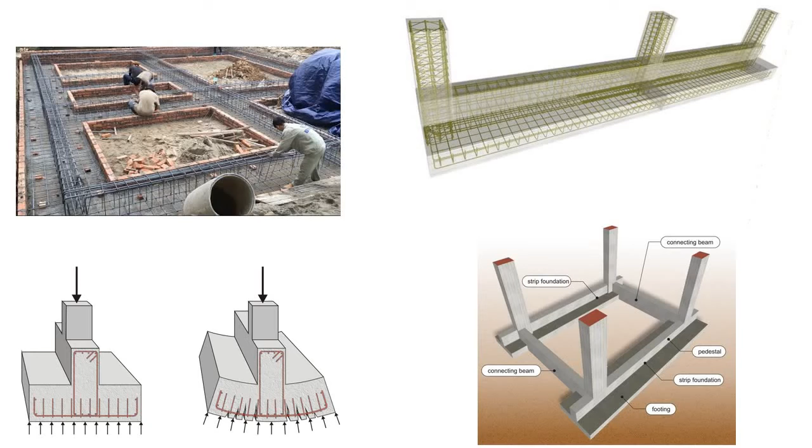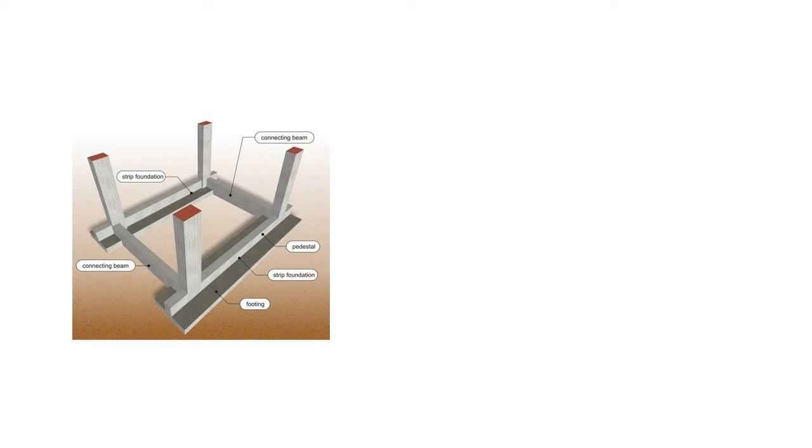This video is going to be all about the detailing of strip foundation and its design aspect. My request to you, if you are already familiar with this type of concept, you can simply skip this video. But if you are a beginner, please watch this video carefully to understand the basic concepts.

Basically, to provide any foundation of any structure, we may have only three options. First one is you can simply put an isolated foundation like this. Or you can provide some strip foundation like this, where you are supporting multiple columns by means of a single foundation, and sometimes a single slab is sufficient, or sometimes you may have to provide an extra beam like this. Here you can see, this is the extra beam, or you can also call it as a foundation beam.

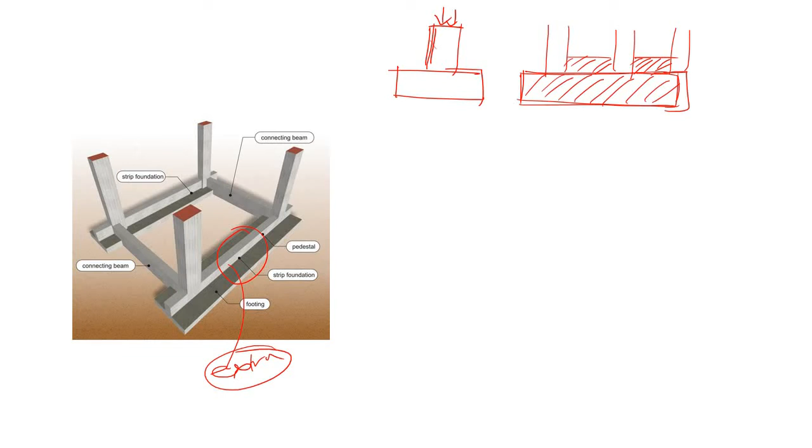And the last option is your deep foundation, or you can say well or pile foundation. You may have multiple piles, and above it you may have some pile cap like this, and then you are supporting your column. I'm not going into the detailing about isolated foundation or the piling foundation. In this video I will discuss about this, the second option, that is your strip foundation.

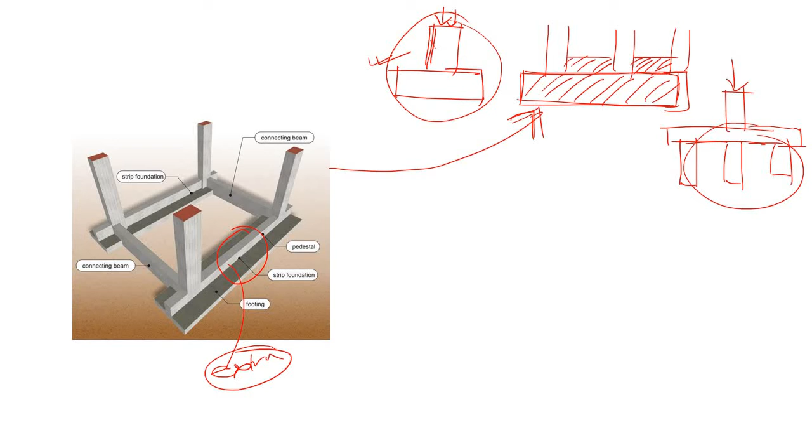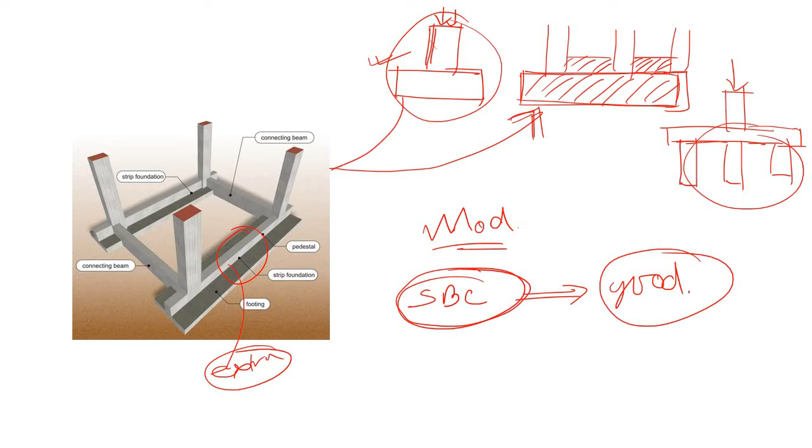So when do we need a strip foundation? Of course, when an isolated foundation is not sufficient and a pile foundation is not needed. Basically when you have a moderate category load, or the soil bearing capacity of the soil is not that much good. If the safe bearing capacity is good, in that case the isolated foundation is sufficient for a moderate category load. But if the safe bearing capacity is not that much satisfactory, or if the load is slightly on the higher range, in that case we may have to use this strip foundation.

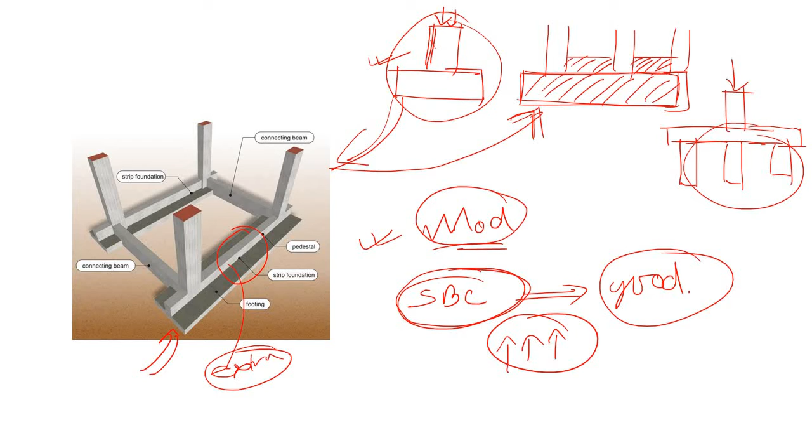Now this is a very diplomatic answer. As an engineer, we always have to give answer based on data. So first let me erase this one.

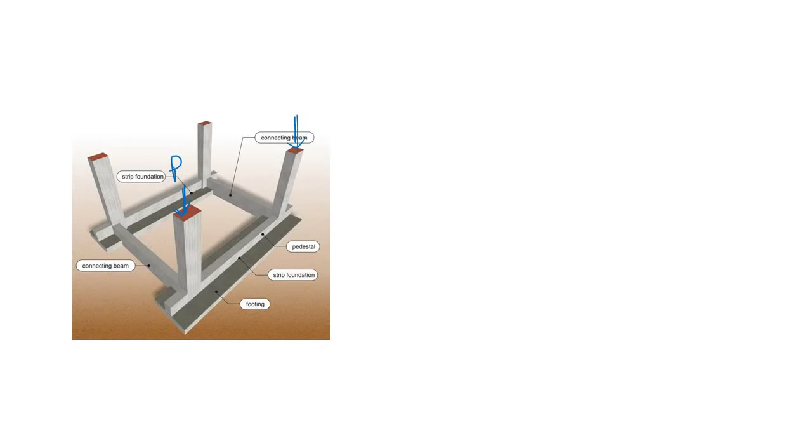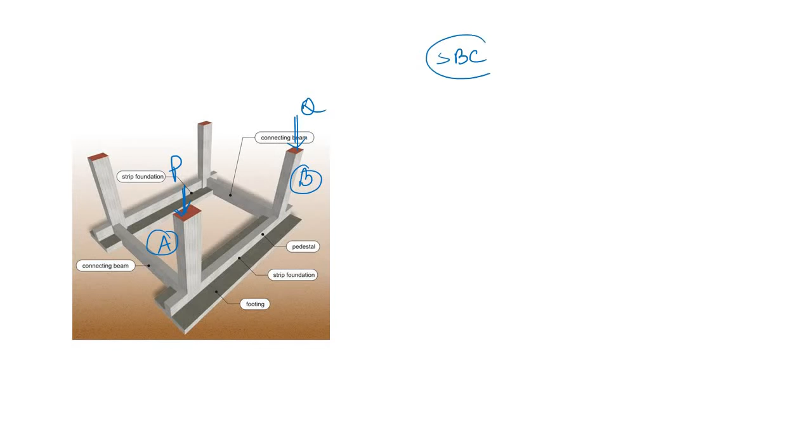Let's say this is the load coming on this column, P, and this is the load coming on column B, let's say this is Q. This is column A, and this is column B. Very clear? Now based on your safe bearing capacity of the soil, you can calculate what is the area required for an isolated foundation. So for isolated foundation, area requirement for column A is, let's say, this much area. If you are supposed to provide an isolated foundation for column A to carry this load P, you have to provide this much area based on the safe bearing capacity of the soil.

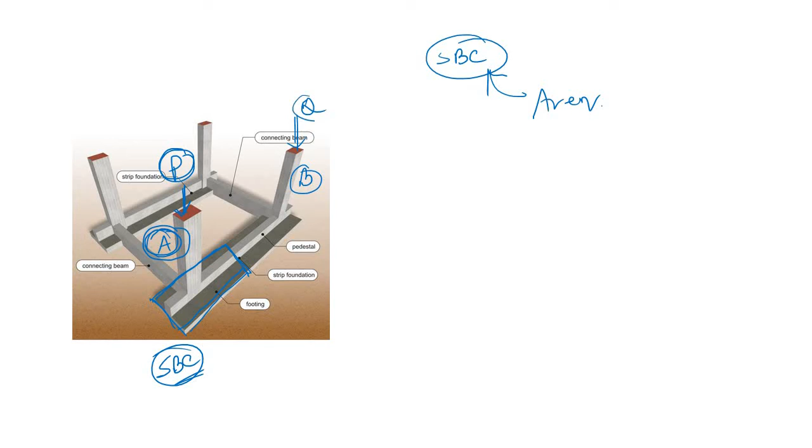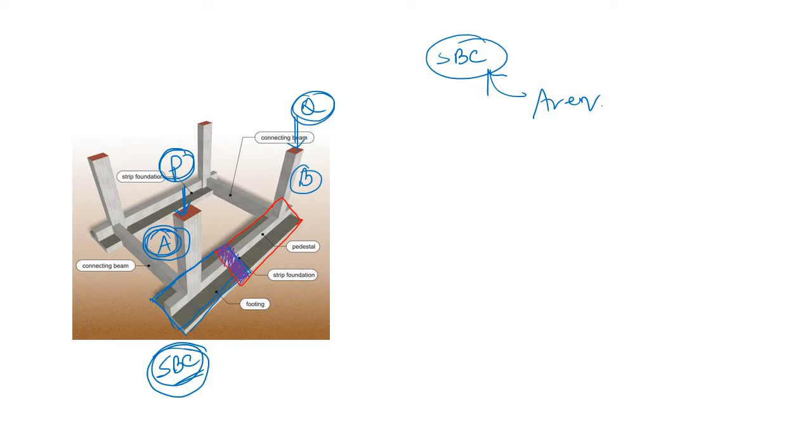Now, based on loading condition and the same safe bearing capacity of the soil, let's say the area requirement for column B is, let's say, this much. So now you can see that we have an overlap zone. Here you can see this is the overlap zone. So in this case, you cannot go for an isolated footing. It is not allowed because the area requirement is much higher and you do not have much space to provide this area. So in this case, what is the option? The option is you can simply combine these two footings to form a single footing, and this is known as strip footing.

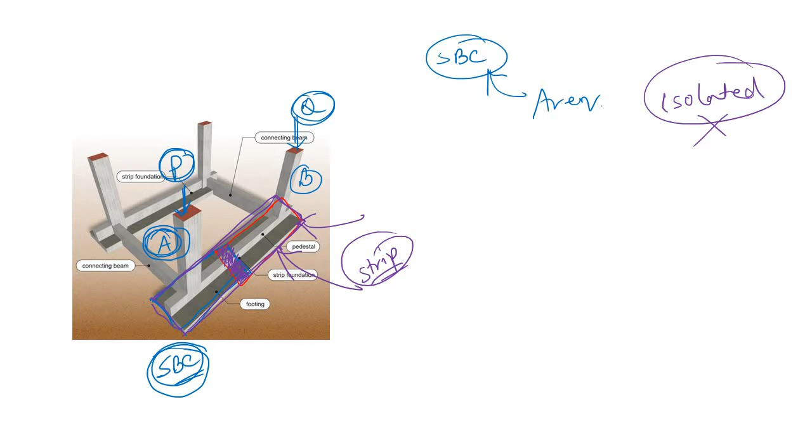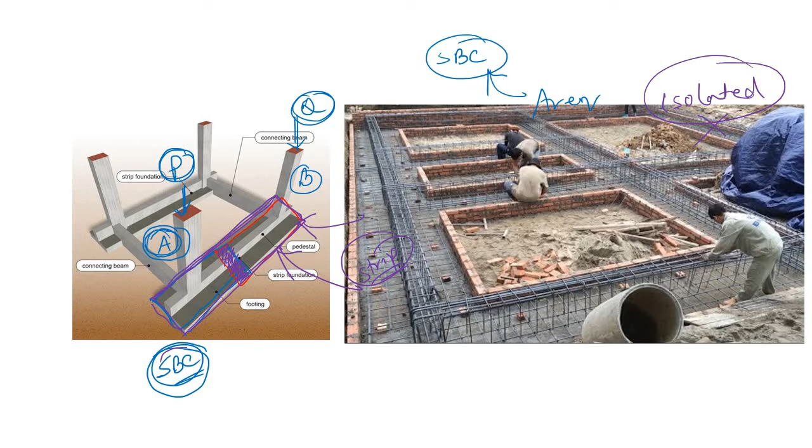That's it. So now you have got the idea when you need to provide the strip footing. Now what are the components of a strip footing? Here you can see that simply to provide the bearing capacity, we need a slab type element like this. This is known as the footing slab. So here in this actual figure, in this actual work, this is the slab footing.

Now there is another part that is known as the foundation beam. That is, this is the beam. Now why is this beam required? Why is this slab not sufficient?

Well, let's understand. So at the very first, let's say you have an isolated footing like this. This is the column and this is the footing slab. You have a load like this. So based on this loading, definitely at the bottom you will have some reaction like this.

Due to this reaction, if we take only this particular zone, it is fixed. This is the UDL. So what is the bending moment diagram?

Simply the bending moment diagram is something like this. So this is the bending moment diagram, and based on this, this is the hogging bending moment diagram, so it is bending like this.

As a result, there is a tendency that at the bottom of the concrete there will be a crack. Why? Because concrete is weak in tension, and here the tension is occurring at the bottom, while at the top there is compression.

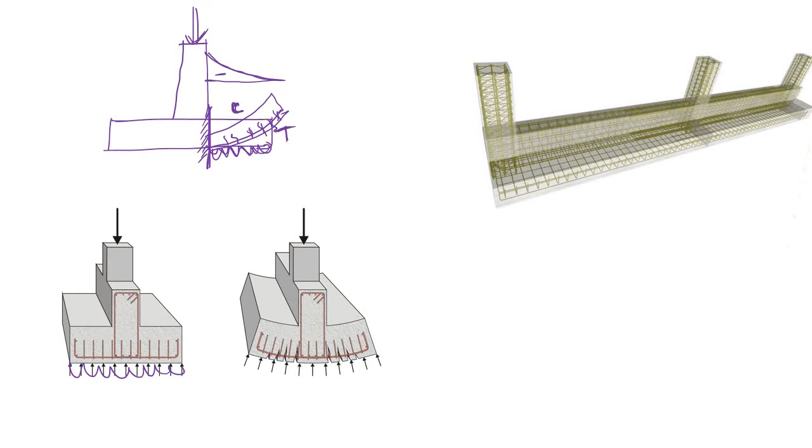So to resist this tension, or to resist this crack, what can we do? We can simply put this reinforcement in this footing slab. By providing this reinforcement, you have resisted the cracks that are supposed to occur at the bottom of this footing slab.

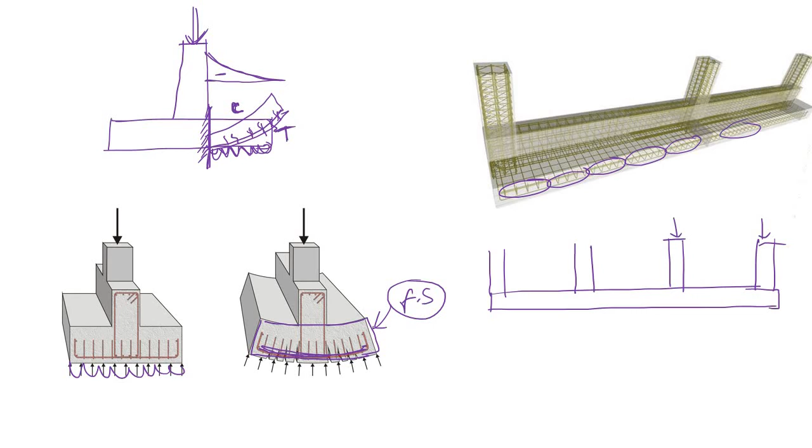Now let's say in this particular strip you have multiple columns, let's say 4 number of columns. In all of these 4 columns there is load, so based on this load, at the bottom you will have a reaction like this.

Now based on this reaction you will have some bending moment. If you draw the bending moment diagram for this structure, you get a diagram like this. Here is the first support, this is the second, this is the third, and this is the fourth support.

Here you can see that at the top we have tension, but only for this particular span. So here we have tensile cracks, and at the bottom we have tension only at this support location.

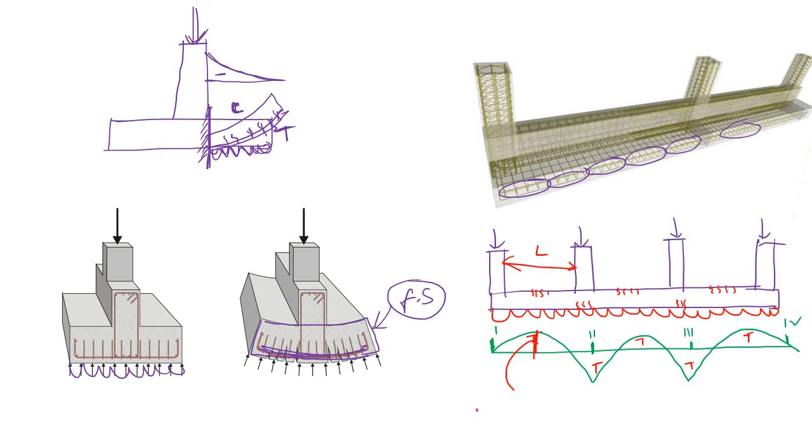So based on this particular span, you have a certain magnitude of bending moment. Clear? So if the span is long enough, the bending moment is also very high.

And if you are supposed to provide only this footing slab, due to this higher bending moment, you need a huge depth like this. This is the total depth of this concrete.

You know that the moment carrying capacity of any section is simply a function of its depth: Mu equals constant times b d square. So b is the width here, this is the width of this foundation, and in the actual case this is the width.

Now let's say from this column to this column the span is very high. In that case, the bending moment occurring in this zone, or in this zone, and this middle span, is very high.

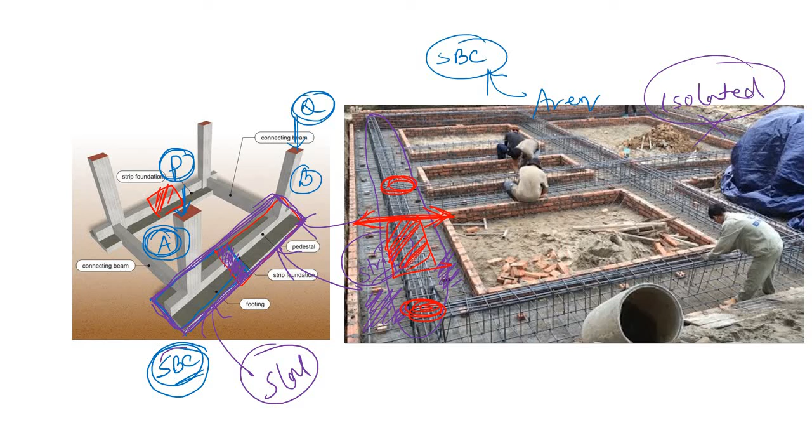So to carry this high bending moment, what do you have to do? You have to increase the depth of the footing slab, because B is fixed. B is this one, so this is the B.

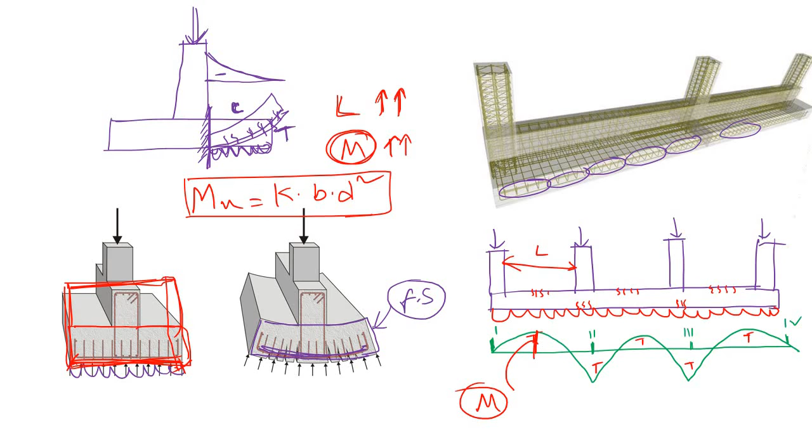So to provide a huge depth here, your structure may not be economical. It is not at all economical. So you have to reduce this depth of the footing slab.

So in that case, what can you do? Simply you have to add a stiffener in this zone. So this is the stiffener, this is the stiffener, and this is another stiffener.

Now the question is how you can provide this stiffener. As your foundation is a concrete structure, you can provide this stiffener only by concrete, and only in that case the compatibility will be maintained. So the concrete stiffener is nothing but a beam like this, a simple beam.

So now you have got the idea about the foundation beam. What is the foundation beam basically? It's nothing but a concrete stiffener that is provided to reduce the depth of this footing slab, and it is mainly required when the span is much higher.

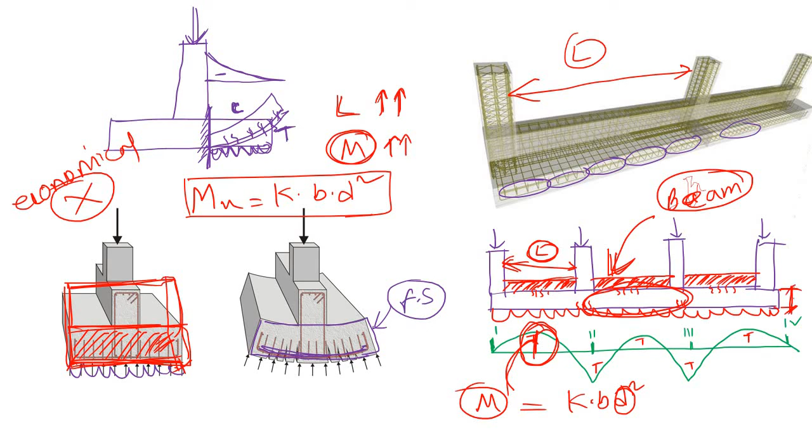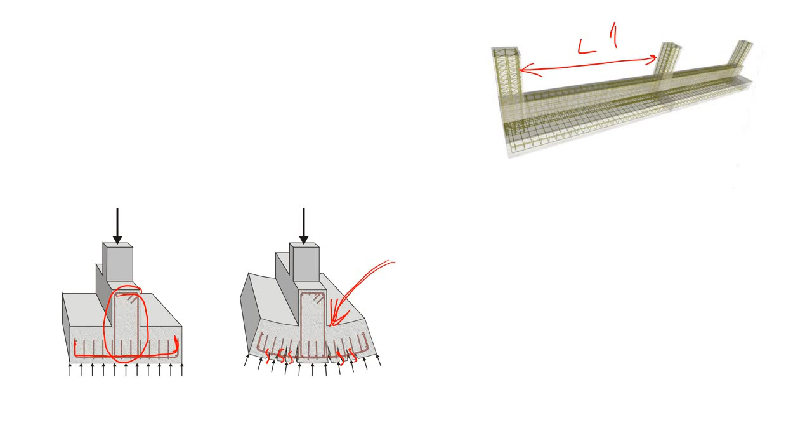Clear? So now you have got the idea why this reinforcement has been provided, to resist this bottom crack. And why this beam has been provided, to provide the stiffener characteristic in this footing slab if the span between the columns is very high. So that's all about this strip foundation.